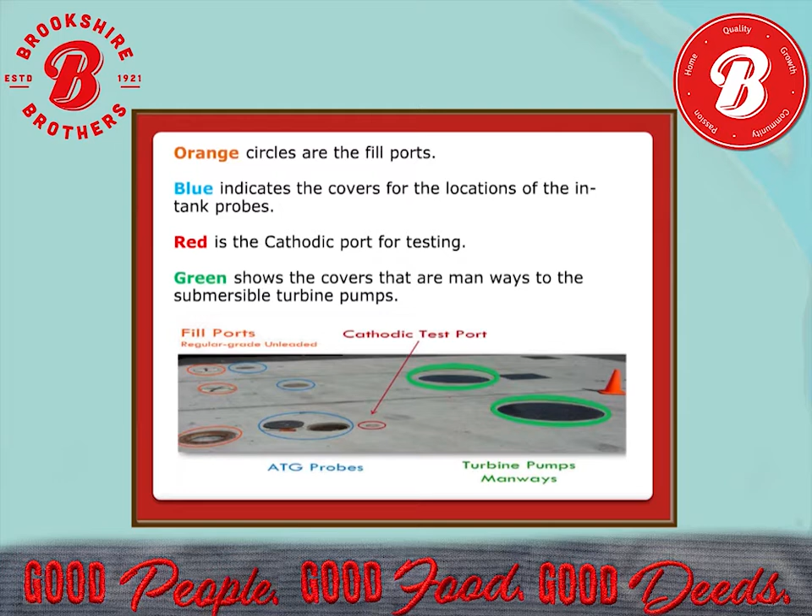Let's take a look at this diagram of the ports and covers. The orange circles are the fill ports. Blue indicates the covers for the locations of the in-tank probes. Red is the cathodic port for testing. Green shows the covers that are manways to the submersible turbine pumps.

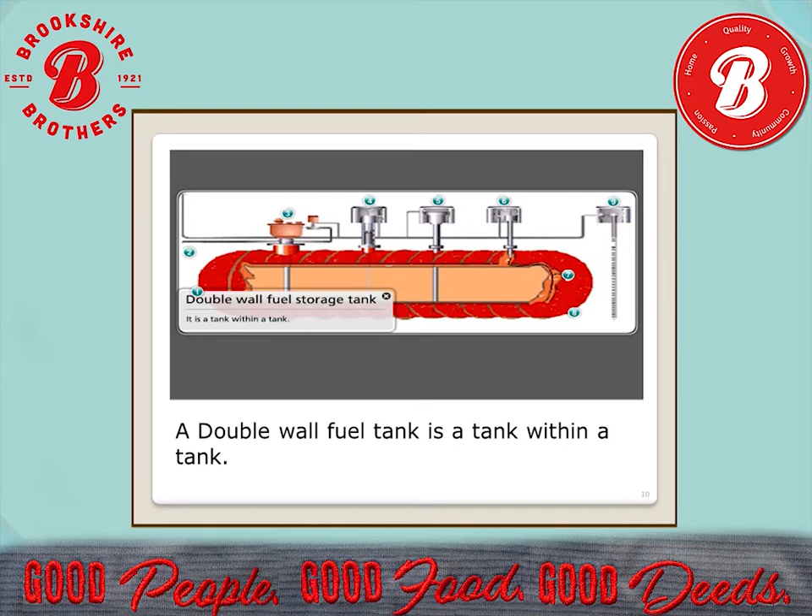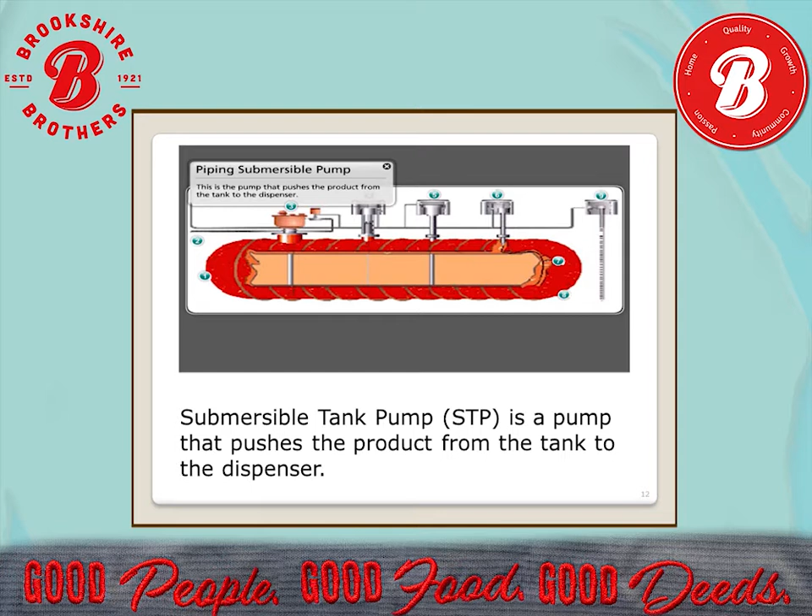Let's take some time to study the components of an underground storage tank. This is a double-wall fuel storage tank, which is a tank within a tank. This is the fuel or product line that carries fuel from the tank to the dispenser. The piping submersible pump is a submersible tank pump, STP, that pushes the product from the tank to the dispenser. This is the Stage 1 vapor recovery port. The EPA requires Stage 1 vapor recovery in certain locations.

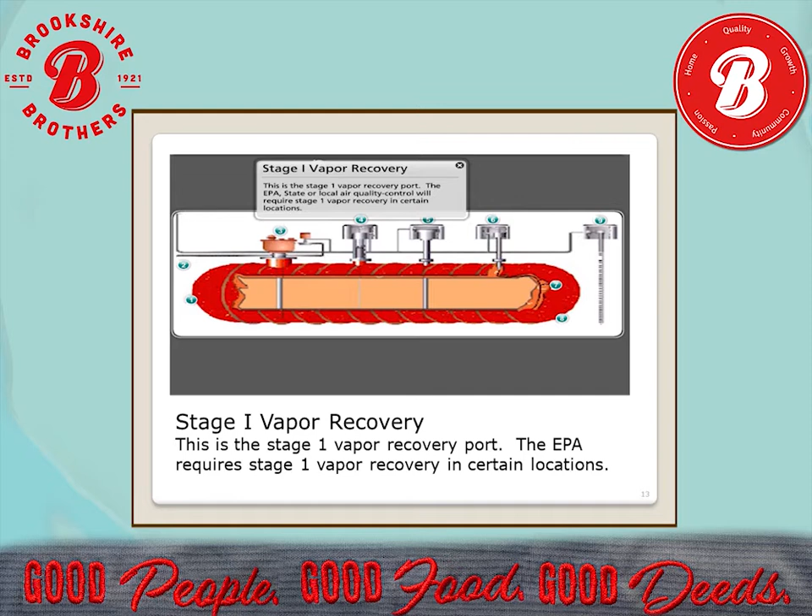This is the fill pipe with spill containment. This is the point at which the delivery driver connects to the tank and delivers product. This is an interstitial monitoring device. Double-wall tanks provide an extra level of release protection. A release from the inner tank will be captured inside the outer barrier. A monitor is used to alert the operator if a leak is suspected between the tank and the barrier.

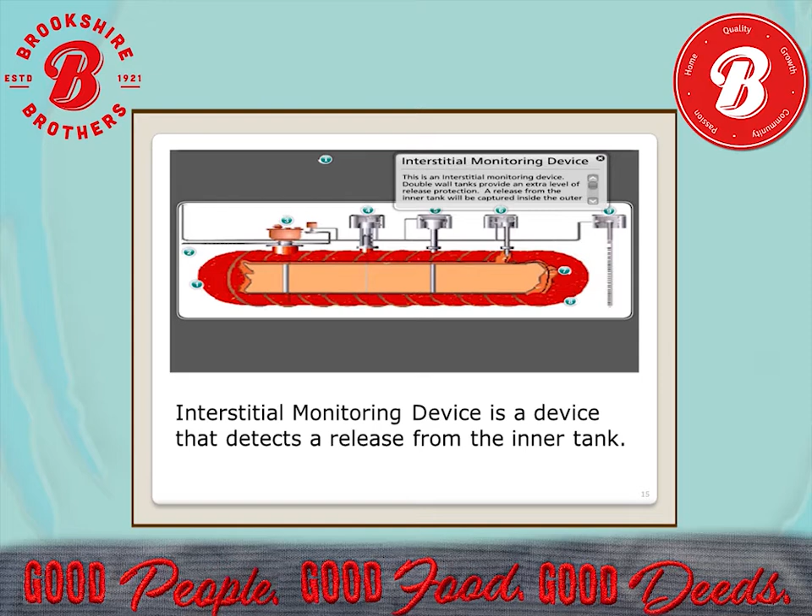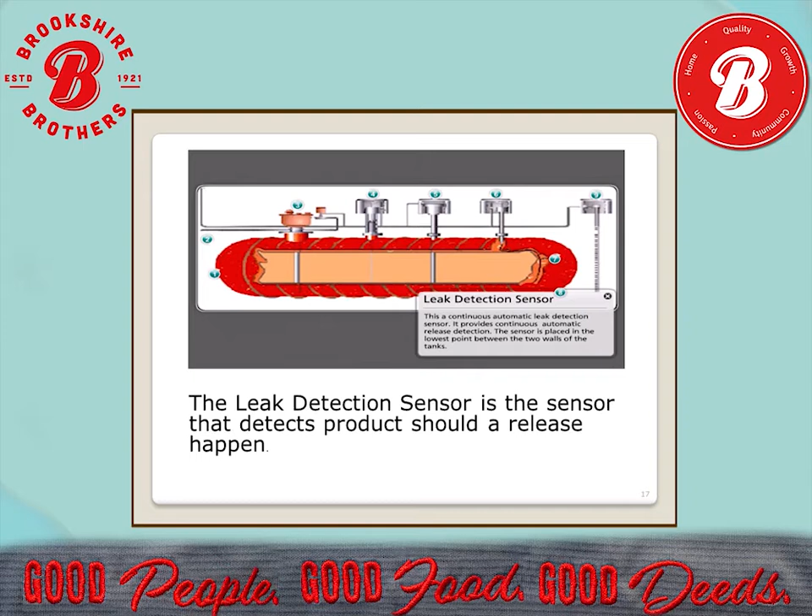This is a monitoring well with sensor and containment, or observation tube with a sensor. Many states require monitoring wells to be positioned around the tank. Monitoring wells can be used to assure compliance of specific criteria and requirements for release detection methods.

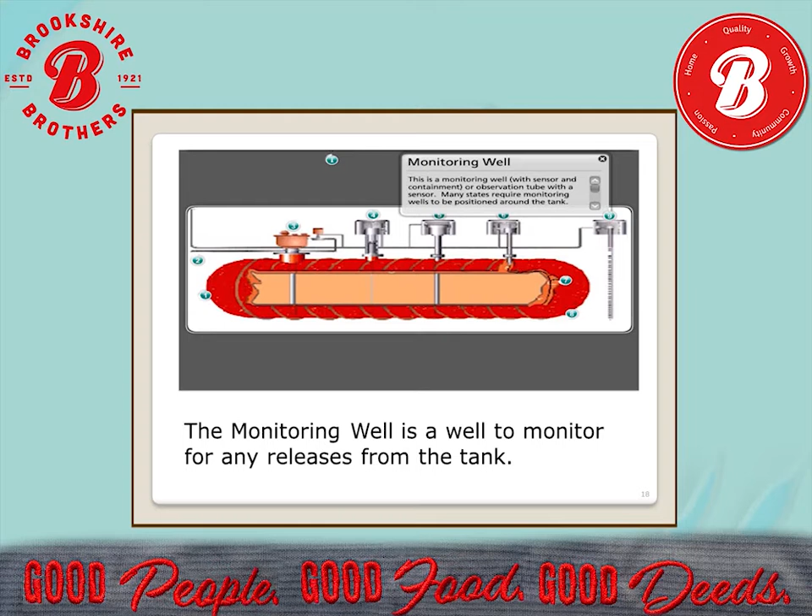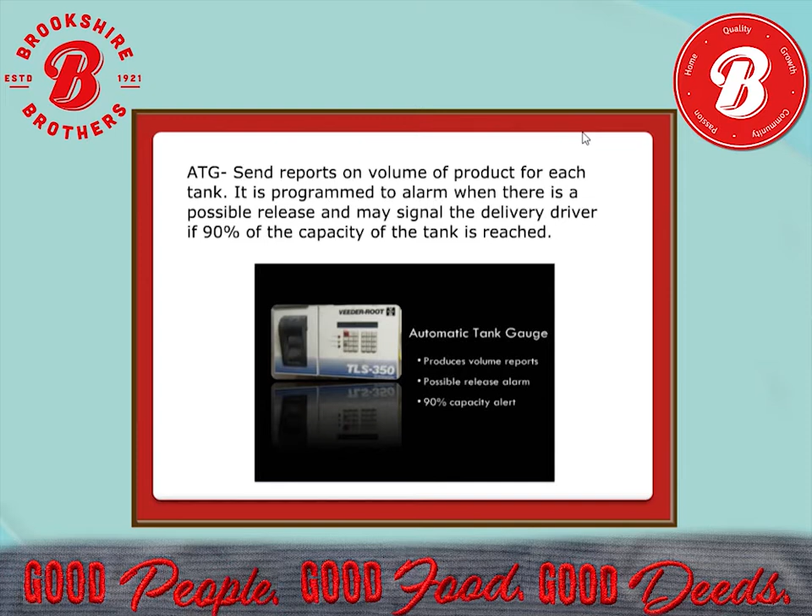The automatic tank gauge, or ATG, sends reports on volume of product for each tank. It is programmed to alarm when there is a possible release and may signal the delivery driver if 90% of the capacity of the tank is reached.

The fill port is where the delivery truck drops fuel. The port should have a marker indicating what product it holds. Spill buckets catch any product that spills when the delivery truck is unloading fuel.

Sump is used to pump product from the tank. The containment catches any product that may escape when pumping. Lids and caps are needed to avoid anything getting dumped into the lines.

For each fill port, there should be a product ID tag. If there is not a tag, please notify your petro maintenance tech.

Stage 1 vapor port has a push and release port. You need to know where it is located. The position of the sensor is important to properly detect product. Make sure it is at the lowest point to properly detect.

Hoses, nozzles, swivels, and handle switch need to be checked for wear and tear. The info screen talks to the customer and the card reader. These are for the customers using credit or debit cards.

Your manager should regularly conduct a walk-around at your site. Check for frayed hoses, damage to your vent pipes, and that your overfill alarm is working properly.

As you conduct a review of the site, check for dead vegetation. This is a sign of a release due to overfilling.